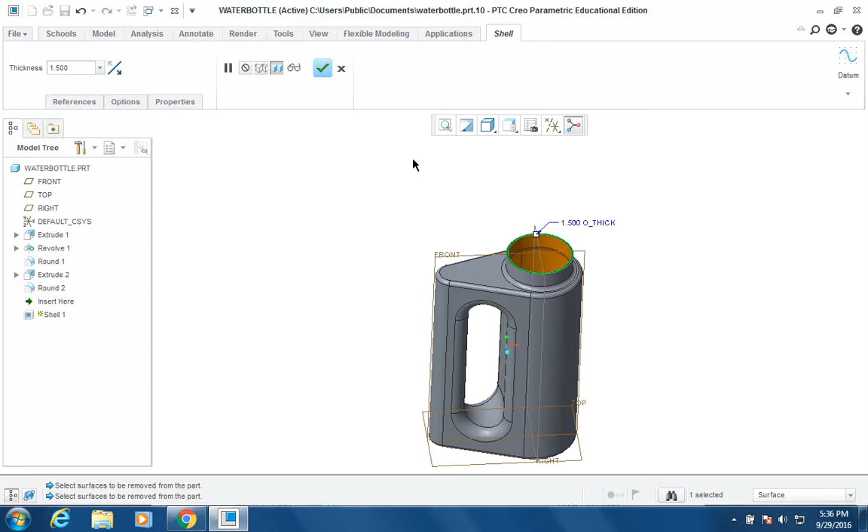So what we're going to do is we're going to define that opening by mousing over the top of the neck of the bottle. It turns green, and I'm going to click, right? And you can see that we've basically removed the top of the bottle there. We're all set here. We're going to green check mark that. All right, save it right away.

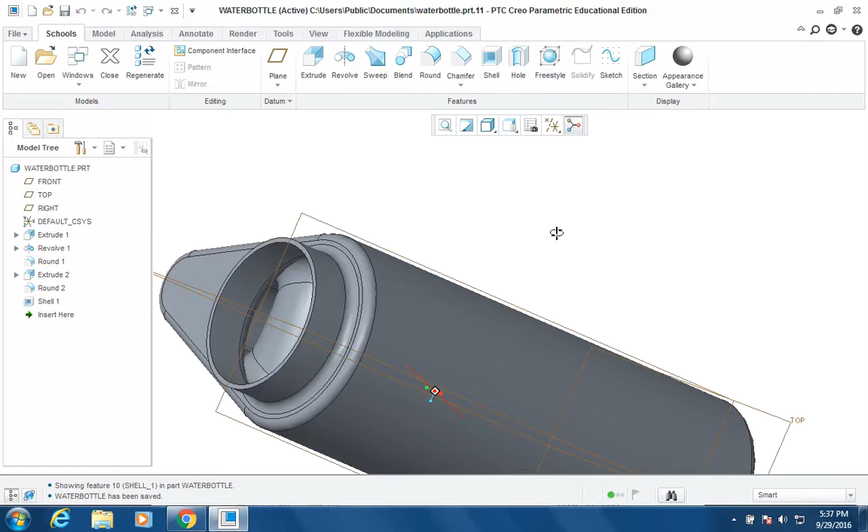And then this is kind of the cool part. You can zoom in to your bottle and take a look inside of the bottle. So you can see the geometry inside of it. So the shelling, the hollowness, extends not just through the main tube, but it also extends into the handle.

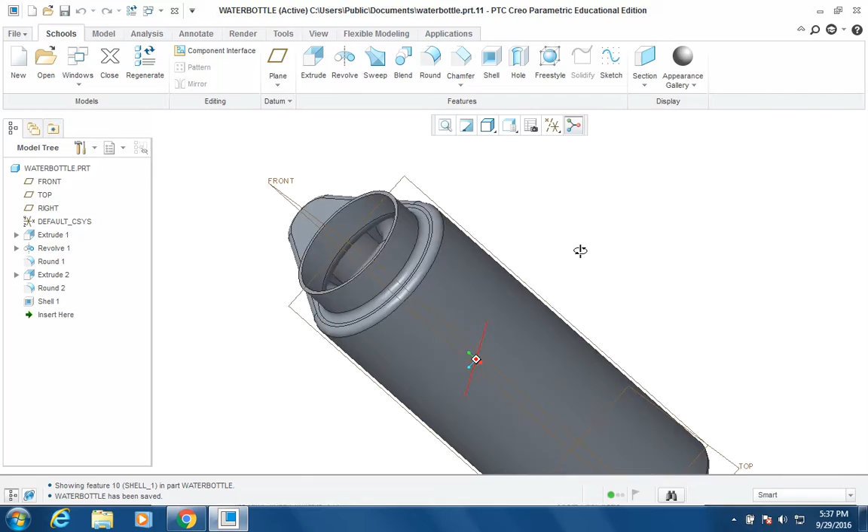So again, kind of like a milk jug, where the liquid flows up and through the handle. We have the same kind of idea here. This is advantageous for the manufacturer because we are using less plastic.

All right, we don't have a solid handle here, so we're using less material, so it's cheaper to make, and at the same time, it's better for the consumer, right? Because for the same size, they get a container that holds more fluid. So it's kind of a win-win there.

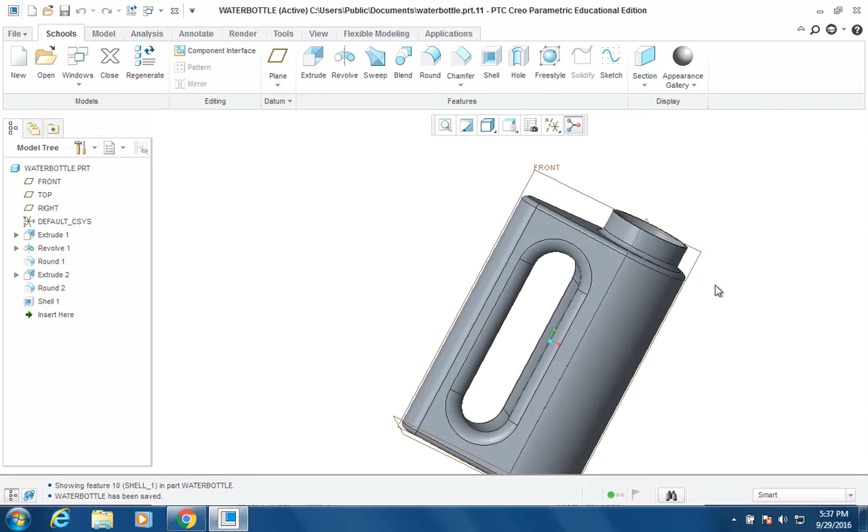All right, so after we're done oohing and aahing on our bottle here, the last thing we're going to do to finish this out is add that compression ring, or that half of the compression fitting, to the top of the neck of our bottle. We're going to do that with a revolve. So go ahead and click on the revolve tool.

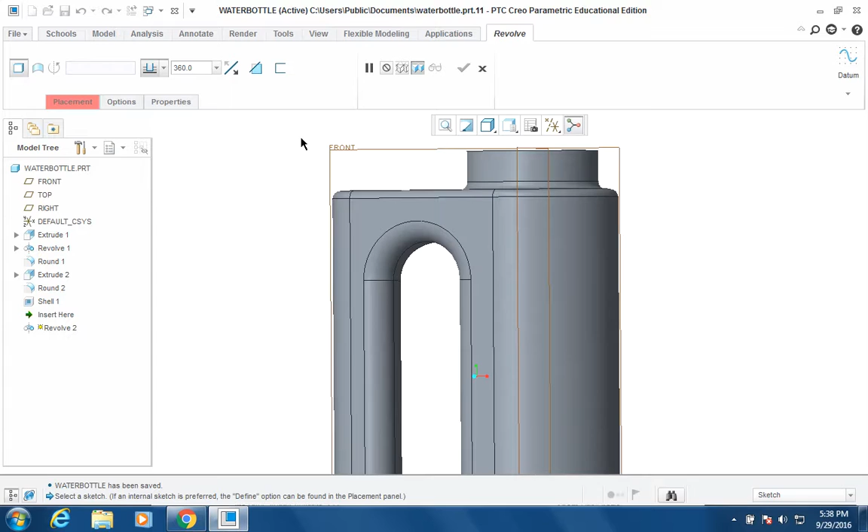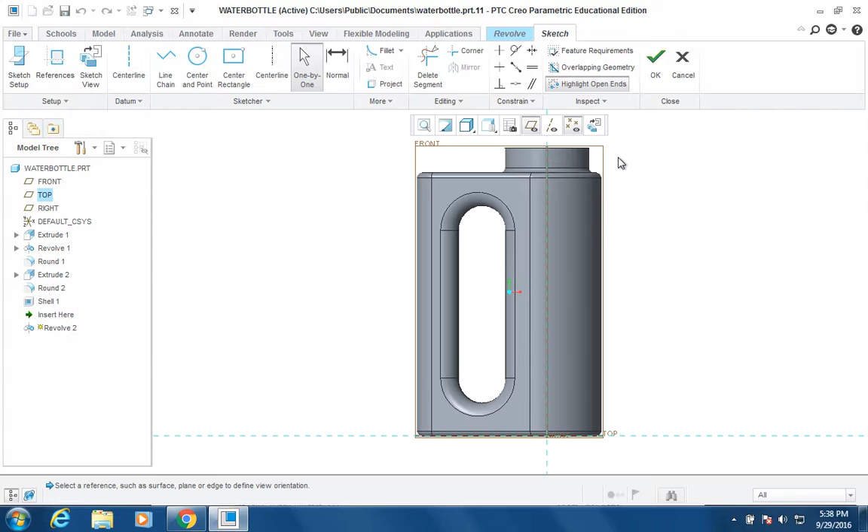We're going to place it on the front plane. So again, the plane that bisects the bottle into two equal but mirrored halves is the plane that we are going to set. So placement, define, and the front plane. Now we're going to go ahead and sketch. This bead of material is pretty small, so I'm going to zoom in on this edge here, on this corner. Okay.

So the next thing is I need to know two things before I start to sketch. I need to know exactly where the top of the neck of this bottle is, where this surface is, and I also need to know where this silhouette is. So I'm going to go over to my reference tool and click on that. And I'm going to approach the top of the bottle until I get that pop-up that says surf, colon, and then it'll give you F8 extrude 2, something like that. It gives you the name of the extrusion.

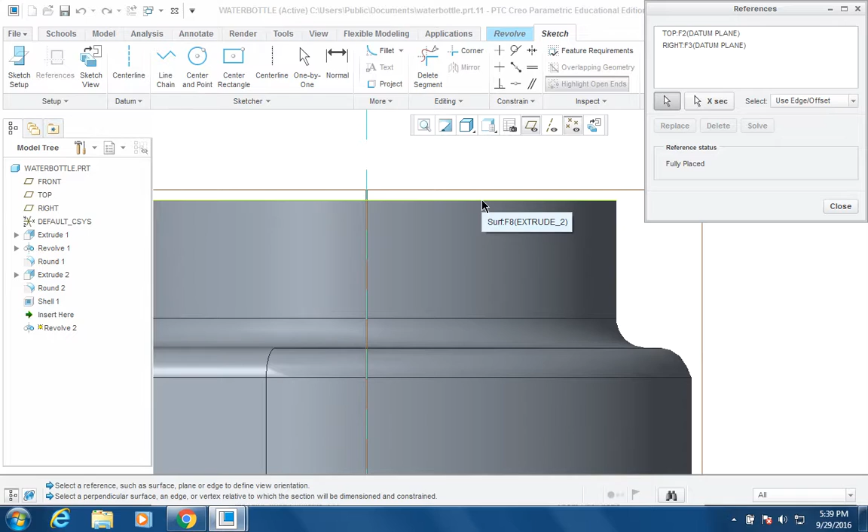So I'm going to click there, and you can see that I've added a dashed reference right across the top of the bottle. So now I know exactly where that top surface is. I need to do the same thing for the silhouette. So I'm going to approach the outside of the bottle, and when I get that pop-up that says SILH for silhouette, I'm going to go ahead and click on that. It's difficult to see, but it is dashed there as well.

If you're not sure what you've done, you can always check your references box here, your pop-up. And you can see that we have surf for surface, and SILH for silhouette. So I know exactly where these two edges are. So I'm going to go ahead and close that out, and then I'm ready to add my drawing.

What we're going to do is draw a semicircle, which is a kind of arc. But I don't see any of those tools up here in my dashboard, in my toolbox. So we're going to go and look at where it says more. We have the fillet tool here, project here, text tool. I'm going to click on where it says more, and this is going to give me basically all of my tools.

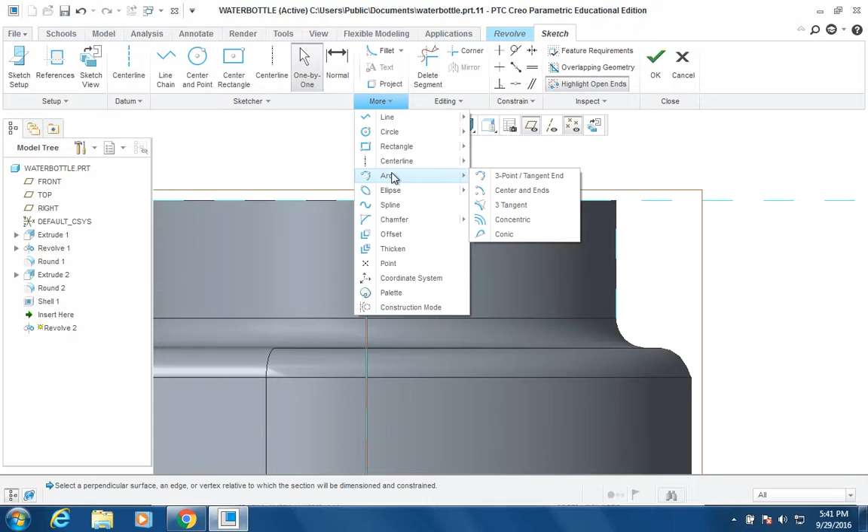I want to go down to the arc section, and I can see that I have a bunch of different arc tools. The one that I want is the center and ends tool. Basically we define a center, and then we define the endpoints for that arc. So I'm going to click on center and ends. This is very similar to the circle tool. I'm dragging around the center of my arc first. I want to place it on the outside silhouette pretty much anywhere except for where it says M.

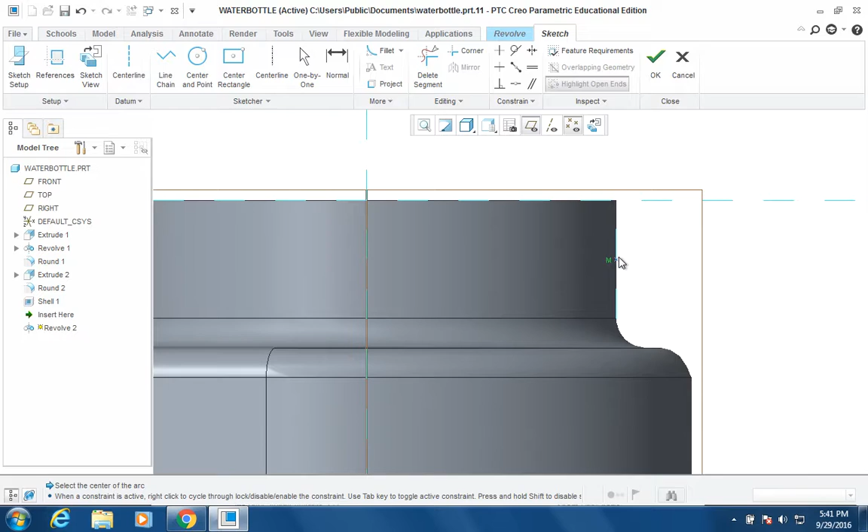I do not want to place it in the middle of that silhouette, of that line segment. I want to place it just above. So the way that this tool works is I'm going to click on the tool here. I'm going to left click, which sets the center of the arc. I'm going to pull straight up the silhouette until I get to the intersection of the vertical silhouette and the horizontal surface references.

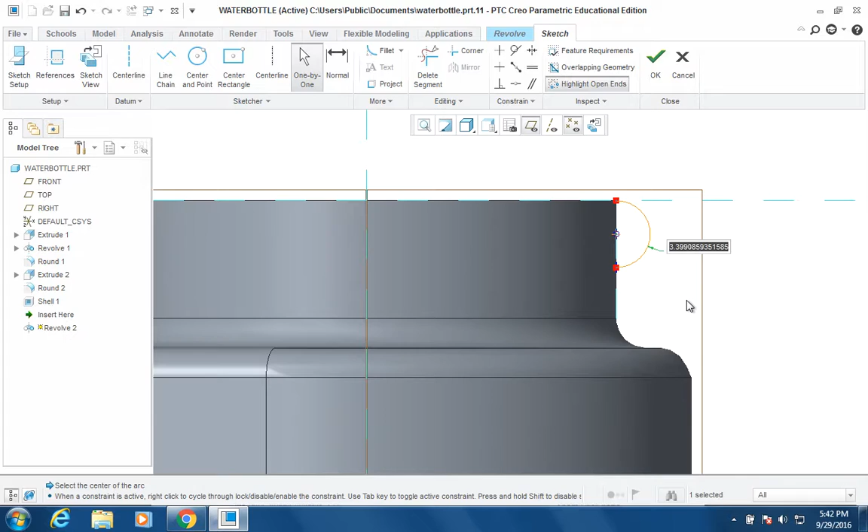Left click and release, and then I'm going to drag that arc all the way around until I contact the silhouette again. Left click and release, and then I can go ahead and deselect the tool. Okay. The arc that I drew has a radius of almost 3.4. What I need is a radius of 1.5. So I'm going to go ahead and double click on that and set that dimension to 1.5.

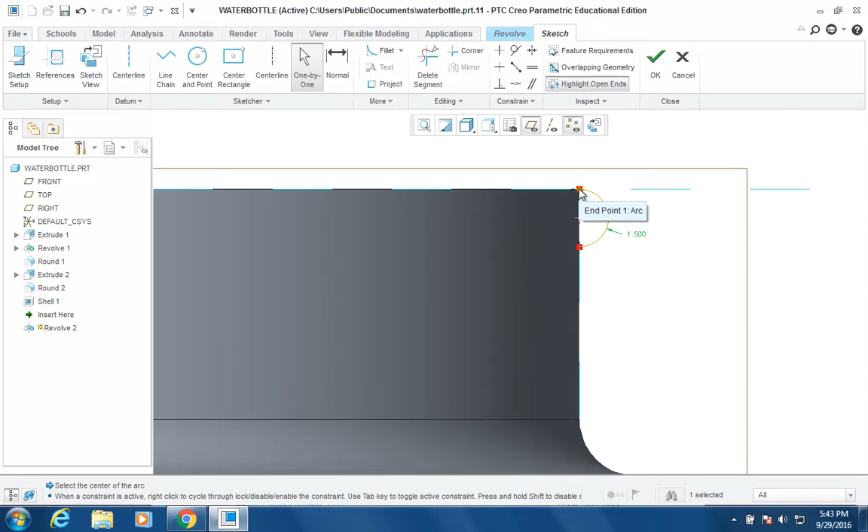Because of the constraint, because that endpoint was at that intersection, the rest of the sketch kind of falls into place. So this point stays where it is, but then my center point and my endpoint of the arc move. I need to finish the sketch by basically connecting the dots. I need to create a closed sketch here.

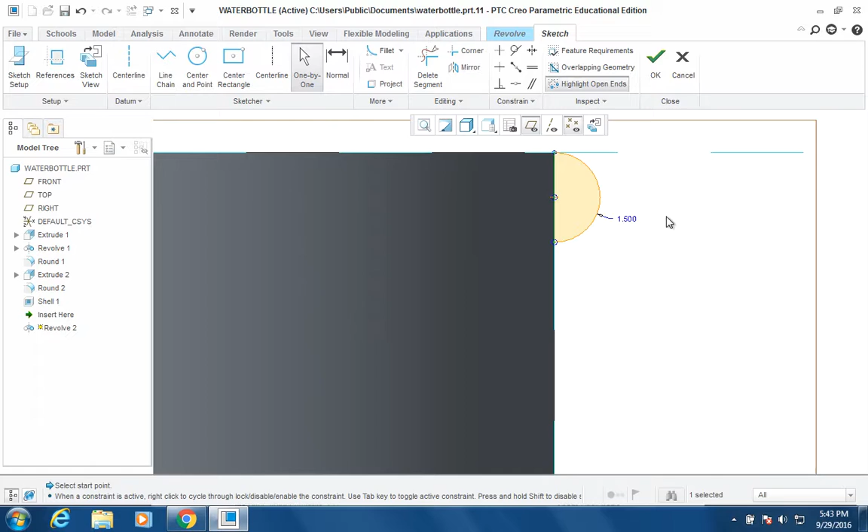So what I'm going to do is use the line tool. I'm going to click on one of the endpoints of the arc. Left click and release. Drag it all the way down until I get to the other endpoint, left click and release. And then center click twice to deselect the tool. So that's my sketch. That looks pretty good.

The last bit of this then is to add our center line, our axis of revolution. We need to revolve around the neck of the bottle. Now remember that the center of the neck was placed above the center of the body of the bottle, the big circle down here. So we already have a centered reference.

So all we're going to do is go over here to the datum section and select center line, and I'm going to place that vertically on that vertical reference that we had before, place it and then left click again. When I deselect the tool and I mouse over that reference, it tells me that it is a center line, but it is also the axis of revolution, which is exactly what we want.

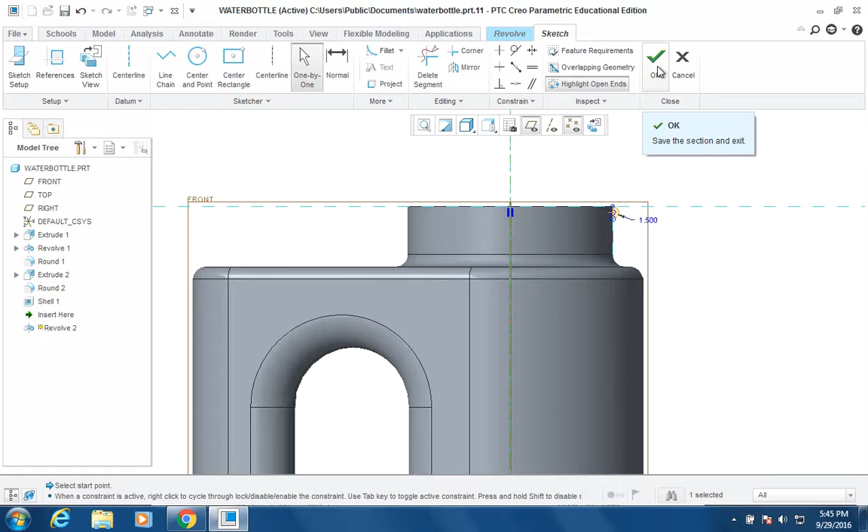Okay, my sketch is set. I'm going to green check mark that. I can see the preview. I have a 360-degree revolve all the way around the outside of the neck of the bottle. It looks good. I'm going to green check mark that. I'm going to save it right away. And let's take a look at the bottle one more time.

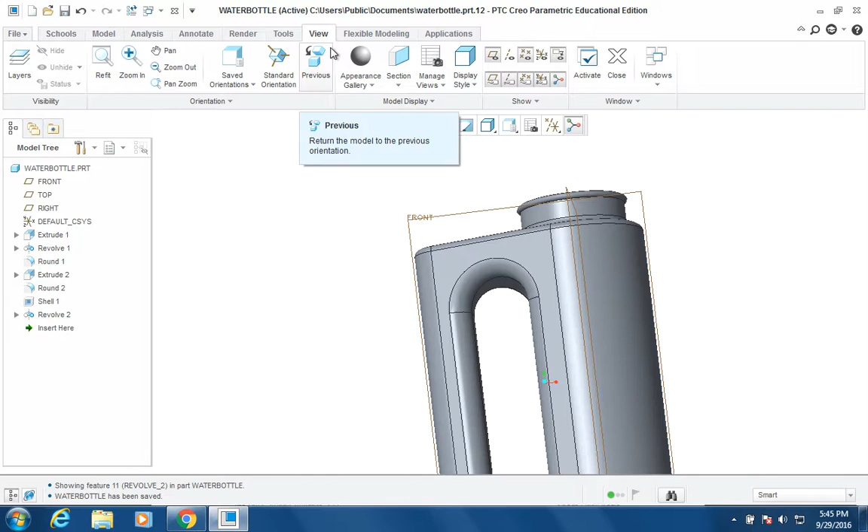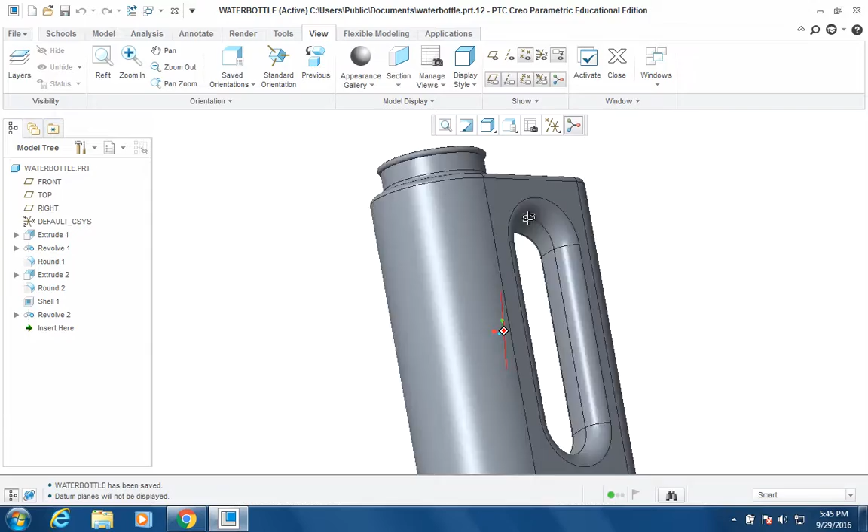I'm gonna go to view, and I'm gonna turn off my planes view, so we don't have the planes in the way. And this is what we have. So our bottle is finished at this point. Some pretty interesting geometry associated with the creation of this thing. So that's pretty much it for now. You can go ahead and play with your bottle there for a while if you want.